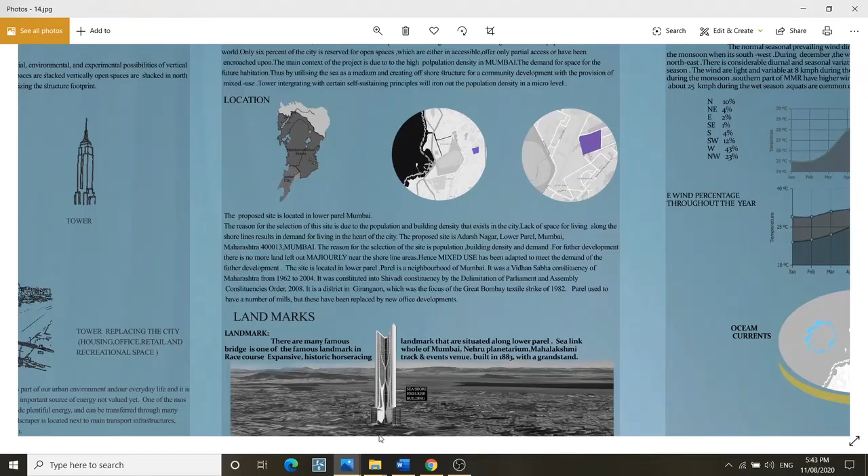There are many famous landmarks situated near the site. One of the famous landmarks near Lower Parel is the Sea Link, one of the most famous landmarks in all of Mumbai. The Nehru Planetarium is also situated near the site, and there is a historic site, the Mahalakshmi Racecourse, built in 1883. There is also a hospital, SRCC Hospital, and the National Sports Club of India. These are the famous landmarks situated near the site.

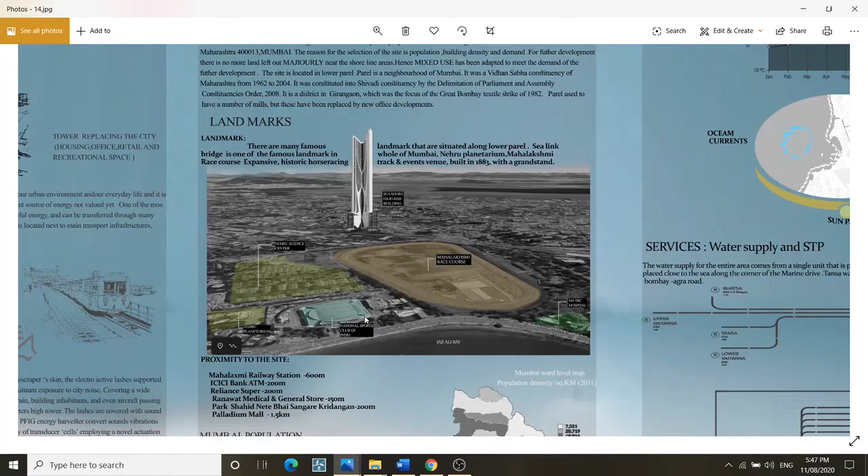Mahalakshmi railway station is 600 meters away from the site, and there are supermarkets and banks nearby. The Palladium Mall is 1.5 kilometers from the site.

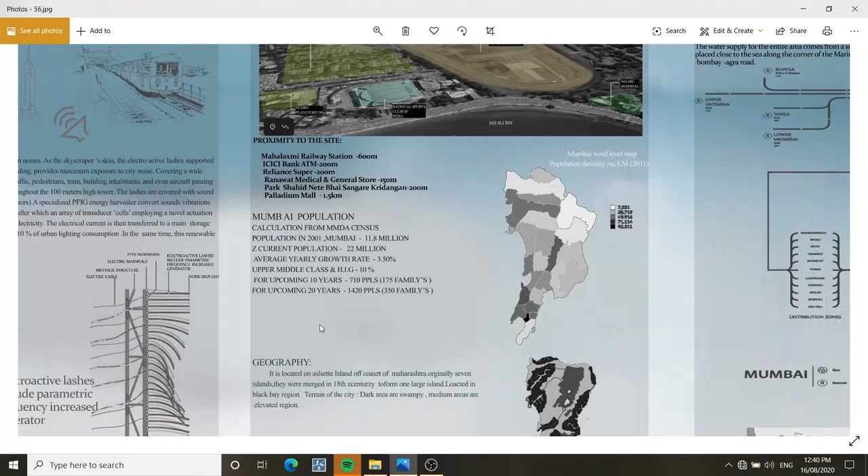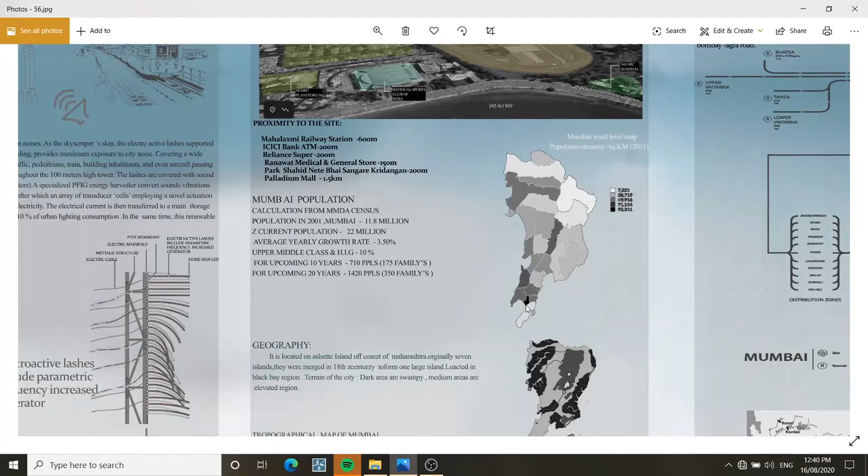The Mumbai population calculation according to the 2001 census is 11.8 million. The current population is 22 million. As you can see in this map, the lighter color represents low population, and the darker color represents denser, more populated areas.

Average yearly growth rate is 3.50%. The upper middle class and higher income growth is 10%. For the upcoming 10 years there will be 175 families, and for the upcoming 20 years there will be 350 families.

Geography: it is located on Salsette Island off the coast of Maharashtra. Originally 7 islands, they were merged in the 18th century to form one large island located in the Black Bay region.

The terrain of the city: the dark areas are swampy, the medium areas are the elevated regions, as you can see in this diagram.

Wind analysis: the normal seasonal prevailing wind direction during the dry season is west-northwest, except during the monsoon when it's southwest. During December, the wind direction fluctuates between west-northwest and east-northeast. There is considerable seasonal variation throughout.

There is little fluctuation in velocity during the dry season. Winds are light and variable at 8 km per hour during the dry season and reach a peak of 13 km per hour during the monsoon. Southern parts of the MMR have higher wind velocity, around 10 km per hour during the dry season, peaking to about 25 km per hour during the wet season.

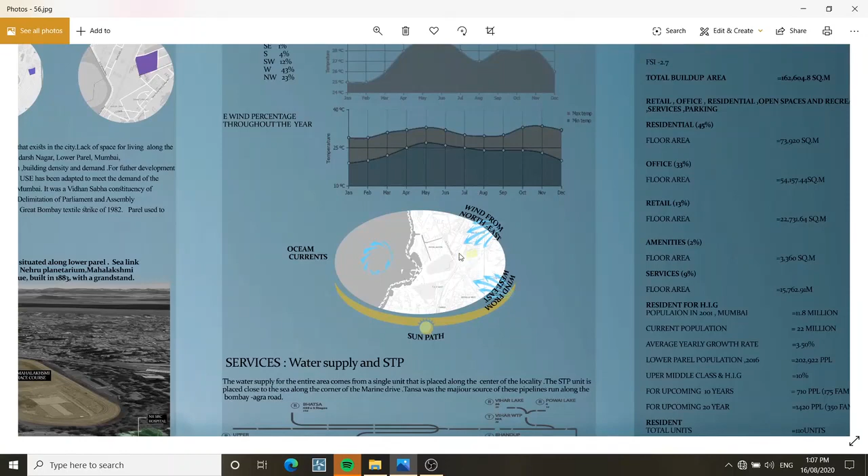And as you can see, this is the site. The wind from the northeast and the wind from the west flow through the site here, and this is the ocean current, and this is the sun path.

The water supply for the entire area comes from a single unit placed along the center of the locality. The STP unit is placed close to the sea along the corner of Marine Drive.

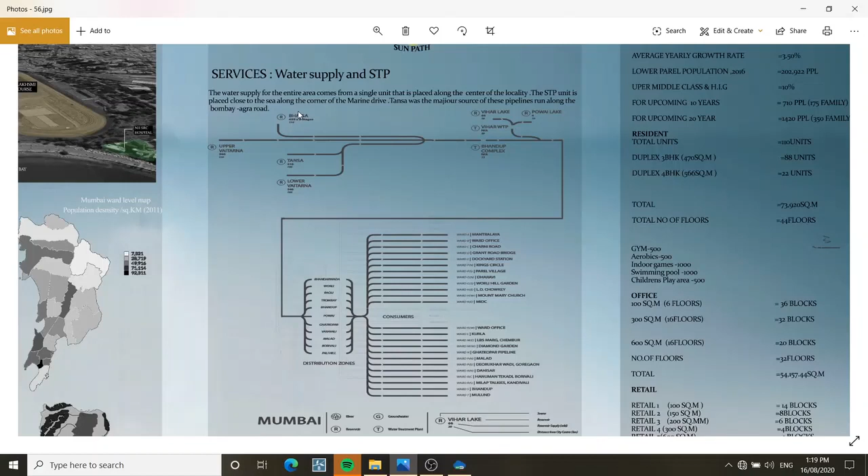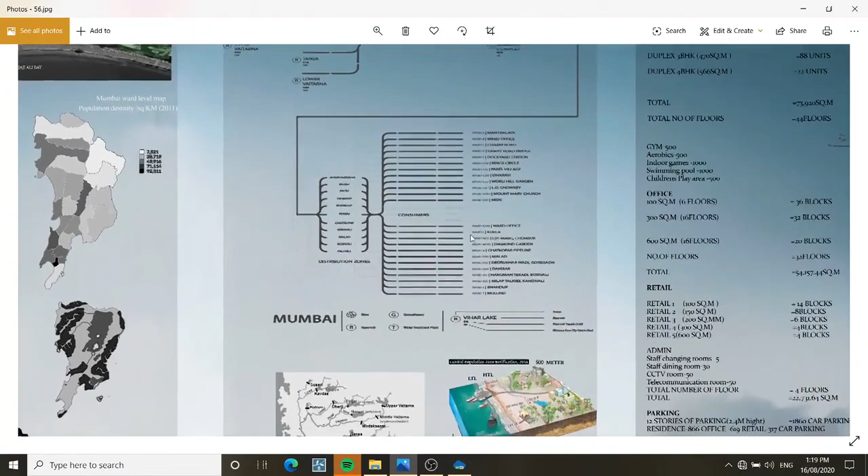Tansa is the major water source for the city. Bhatsa, Tansa, and Lower Vaitarna are the main sources of water, consumed by different areas of the city. This map shows where the water comes from, and these are the rivers supplying water to the main city.

Coastal regulation zone: Mumbai comes under coastal regulation zone 2. Most of Mumbai along the coastline comes under this category.

Area statement: the site area is 14.8 acres. The ground coverage area is 10%, which is 1.48 acres. Road and circulation is 10%, which is 1.48 acres. The OSR is 10%, again 1.48 acres. The FSI is 2.7.

The total build-up area is 1,62,604.8 square meters. The building consists of retail, office, residential, open spaces, recreational spaces, and parking.

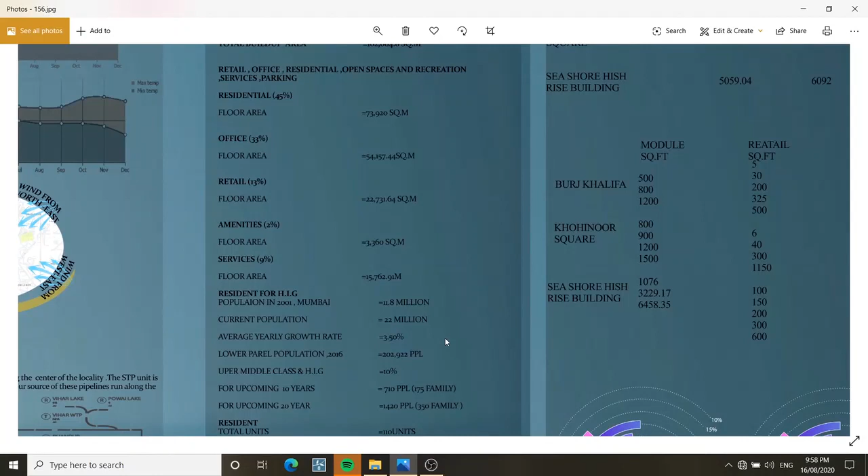The residential consists of 45%, with a floor area of 73,920 square meters. The office consists of 33%, with a floor area of 54,157.44 square meters. The retail consists of 13%.

The retail floor area is 22,731.64 square meters. The amenities consist of 2%, with a floor area of 3,360 square meters. The service area is 15,762.91 square meters.

Residential consists of a total of 110 units. Duplex 3 BHK is 470 square meters, consisting of 88 units, and duplex 4 BHK is 566 square meters, consisting of 22 units. Gym consists of 500 square meters, aerobics 500 square meters, indoor games 1000 square meters, swimming pool 1000 square meters, and child's play area 500 square meters.

In the office, there are three different sizes: 100 square meters, 300 square meters, and 600 square meters. The 100 square meter units consist of 36 blocks, 300 square meters consist of 32 blocks, and 600 square meters consist of 20 blocks. The number of floors is 32, covering 54,157.44 square meters.

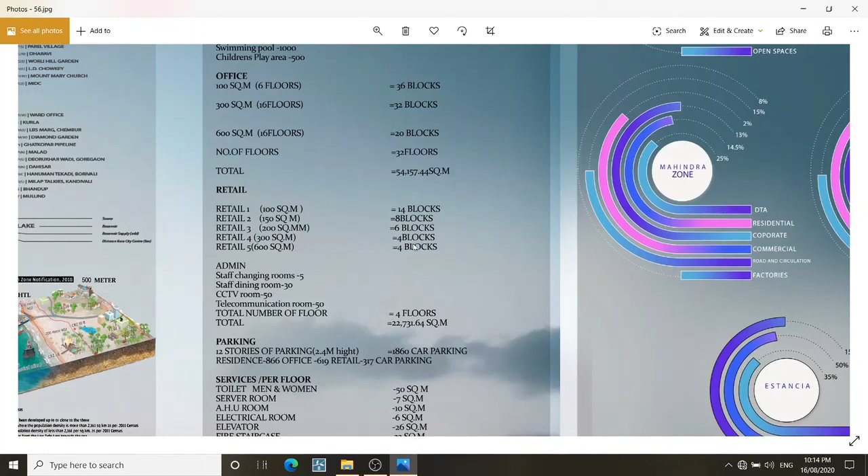The retail also consists of five different types: 100 square meters has 14 blocks, 150 square meters has 8 blocks, 200 square meters has 6 blocks, 300 square meters has 4 blocks, and 600 square meters has 4 blocks.

Parking consists of 12 floors, with a total of 1,860 car parking spaces. Residence consists of 866 car parking, office consists of 619 car parking, and retail consists of 317 car parking.

Service floor: according to the Council of Tall Buildings and Urban Habitat, for every 30 stories there must be a service floor, and for commercial, for every 20 stories there must be a service floor.

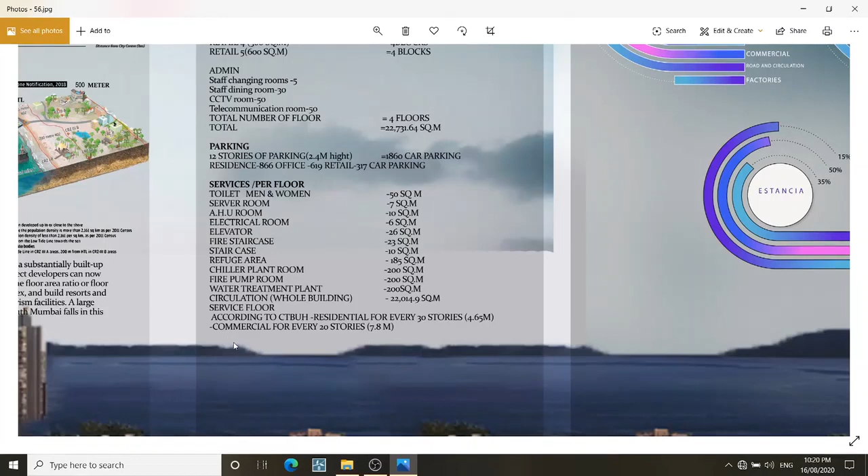Concept: Mumbai continues to overpopulate. It's time to explore the spatial, environmental, and experimental possibilities of vertical living. The tower includes retail shops, offices, housing, and recreational spaces stacked vertically. Open spaces are stacked on the north side for maximum solar lighting.

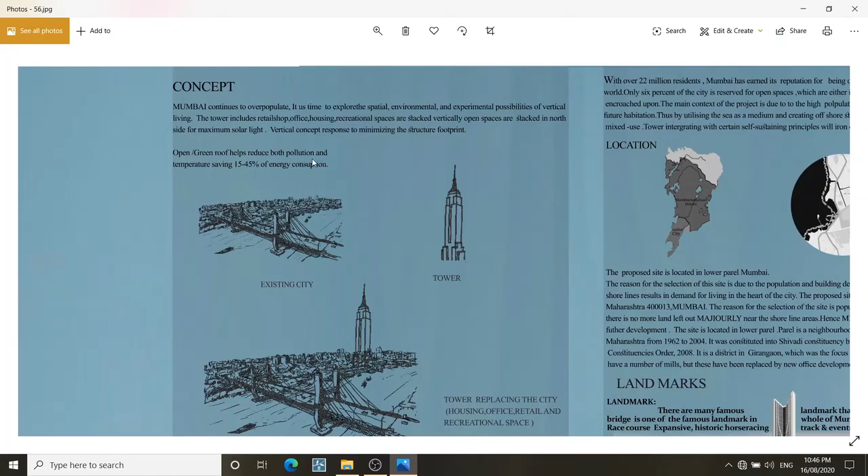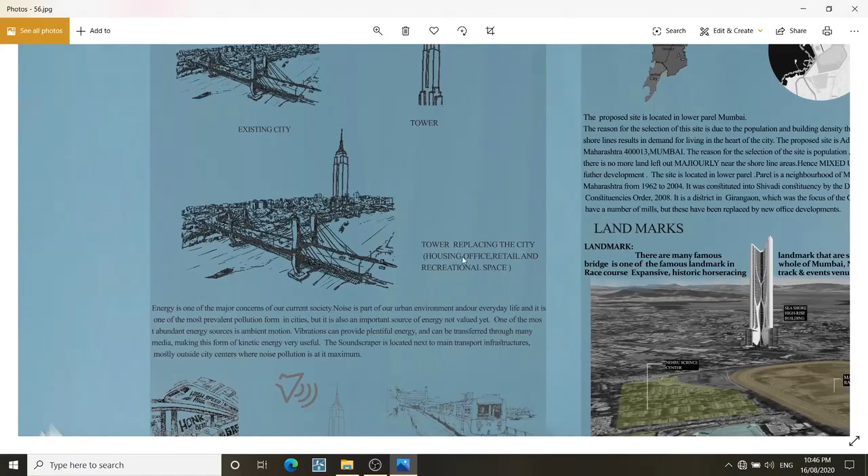The vertical concept responds to minimizing the structural footprint. Open spaces or green roofs help reduce both pollution and temperature, saving 15 to 45% of energy consumption. This is the existing city, and this is the tower replacing the city, consisting of housing, office, retail, and recreational spaces.

Energy is one of the most concerning issues of our current society. Noise is part of our urban environment and everyday life, one of the most prevalent forms of pollution in cities, but it's also an important source of energy not yet valued. One of the most abundant energies is ambient motion. Vibration can also provide plentiful energy and can be transferred through many media, making this form of kinetic energy very useful.

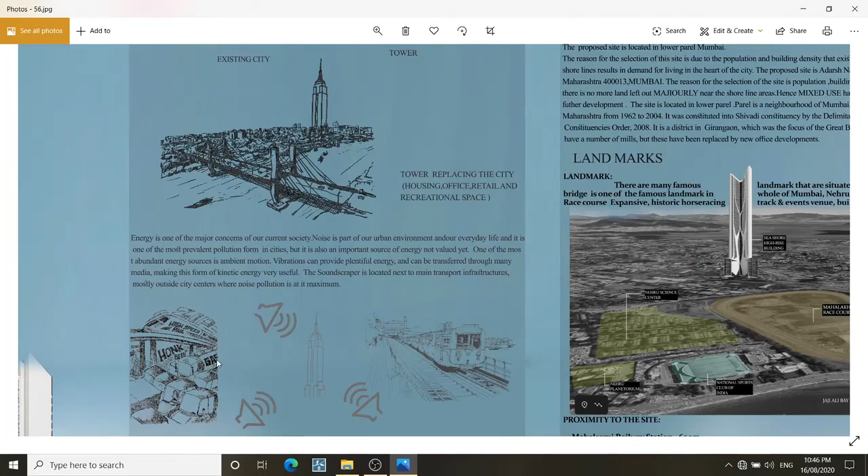The soundscraper is located next to main transport infrastructure, mostly outside city centers where noise pollution is at its maximum. It vibrates depending on the intensity and direction of urban noises.

As the skyscraper skin, electroactive lashes, supported by a light metallic structure, form the exterior of the building, providing maximum exposure to city noise, covering a wide spectrum of frequencies. This noise includes vehicular traffic, pedestrians, trains, building inhabitants, and even aircraft passing overhead.

84,000 electroactive lashes are integrated throughout the 100-meter height tower. The lashes are covered with sound sensor PFIG, a parametric frequency increase generator.

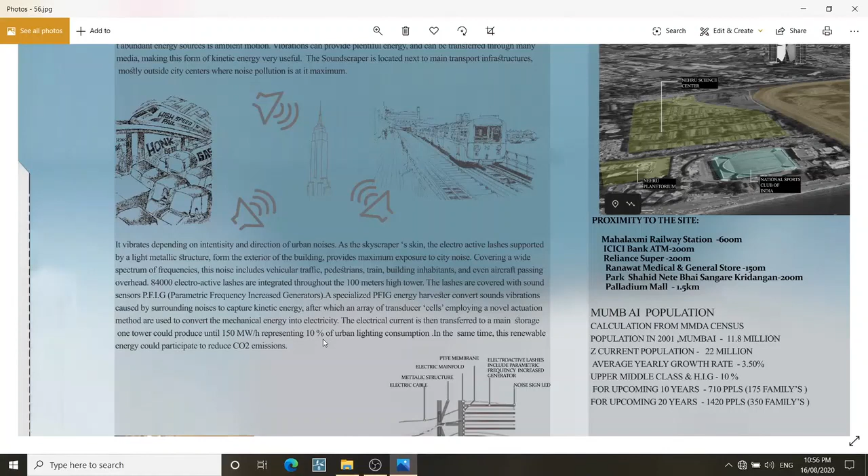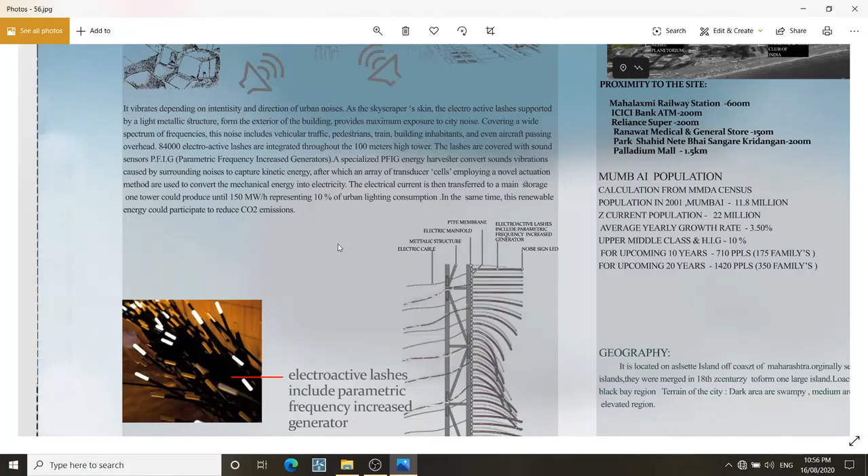A specialized PFIG energy harvester converts sound vibration caused by surrounding noises to capture kinetic energy, after which an array of transducer cells employing a novel actuation method are used to convert mechanical energy into electricity. The electrical current is transferred to a main storage. One tower could produce up to 150 megawatt per hour, representing 10% of urban lighting consumption.

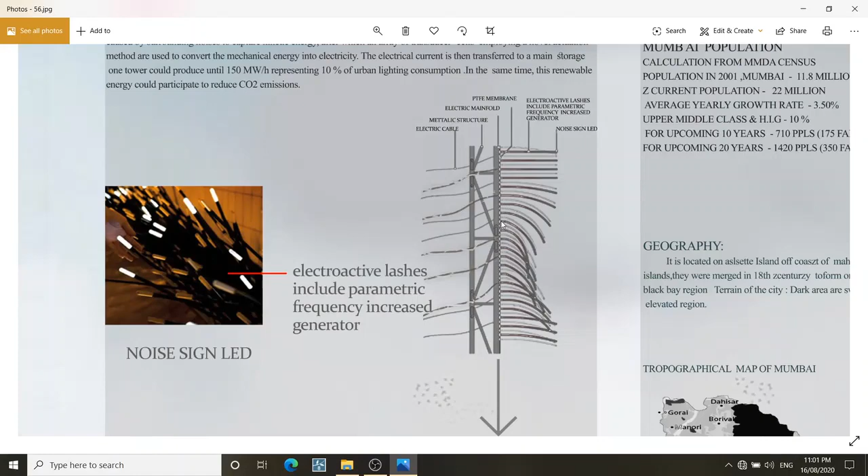In the same time, its renewable energy could participate in reducing CO2 emissions. This is the electroactive lashes, which is also called the noise LED. In this diagram, you can see the electric cable, and this is the metallic structure which supports the electroactive lashes, and at the tip of it you can see the noise LED, and this is the PTFE membrane. Due to vibration and sound, these lashes collect energy and store it in the battery.

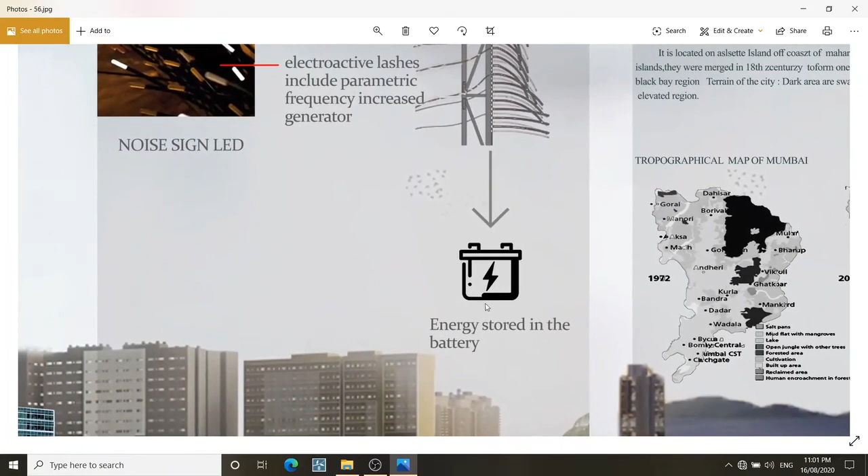Site plan. The site plan area is 14.8 acres. The total build-up area is 1,62,604 square meters. The OSR is 6,022 square meters. The FSI of the building is 2.7. The plot coverage is 6,022 square meters.

This is the site plan of the Seashore High Rise building. There are totally 7 entrances. Gate one is the main entrance, this is the pedestrian entrance, and gate 2 and gate 3 are the entry and exit for the commercial and retail entrances, and gate 4 and gate 5 are the entry and exit for the residential people, and there is a separate entrance for service.

This is the entry and exit of the service entrance, and this is the STP, fire pump room, electrical board, and many others. The site is surrounded by 4 roads: the Lodha Road on the top, Sane Guruji Marg at the right, JP Baruch Marg at the bottom, and Minerva Road at the left side, and there's a railway track passing along the side, which you can see through this image.

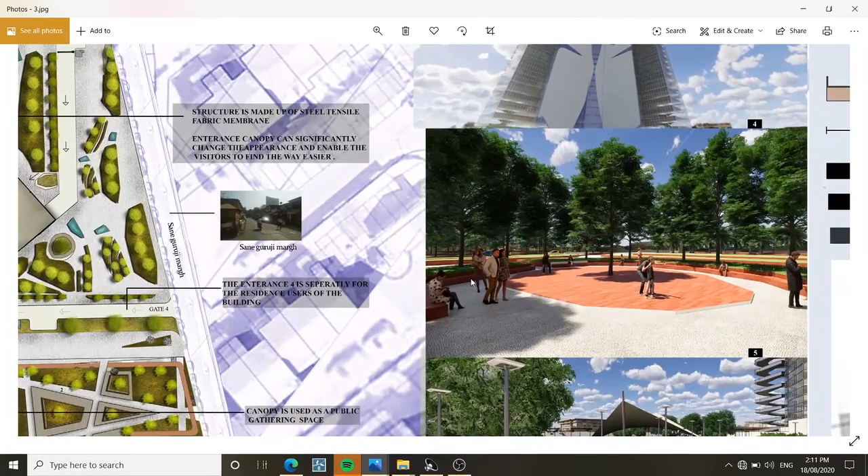As the city becomes more dense and populated, green plaza and open spaces clean the air and improve public health. So I provided a landscape and some water bodies which give us a cool feel, cool air, and you can see through this image this is the landscaping, and there are seating along the landscaping, as you can see here.

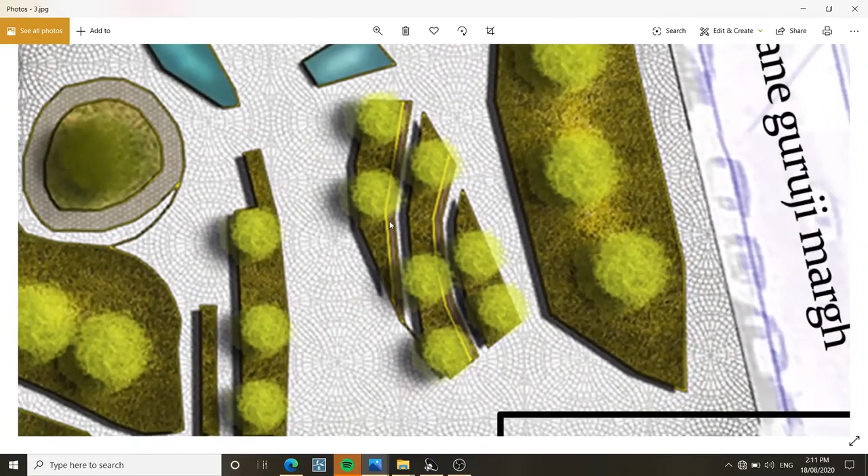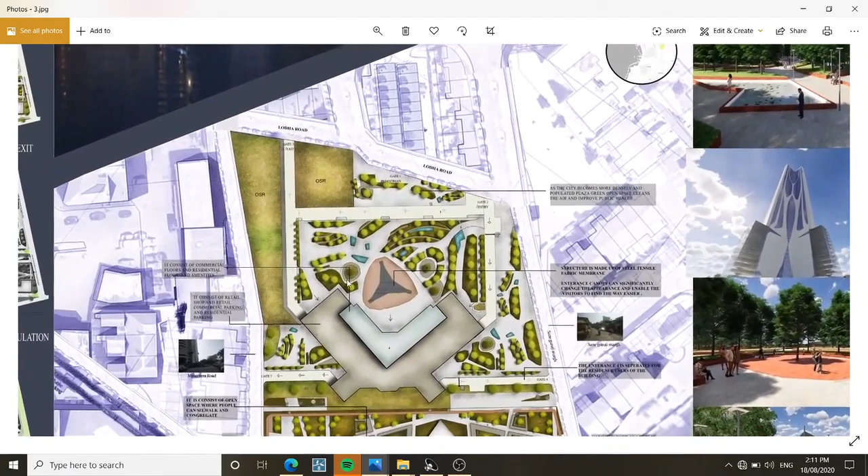This is the seating, and this is the landscaping, and this is the water body. This is a canopy where people can gather. The structure is made up of tensile fabric membrane. At each entrance there is a security booth, which you can see here.

There is a separate park for the people of the Seashore High Rise building, as you can see here. This is the security booth along the park, which allows only the resident people over here, where people can sit, walk, and jog. And this is the jogging track along the park, as you can see here.

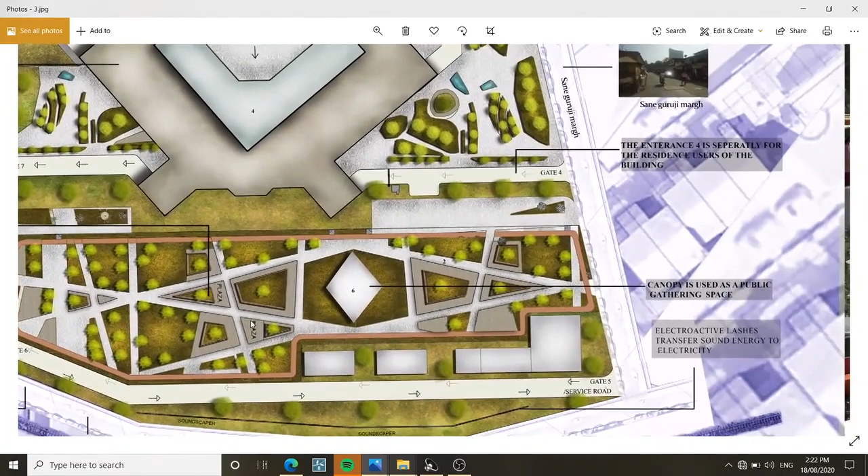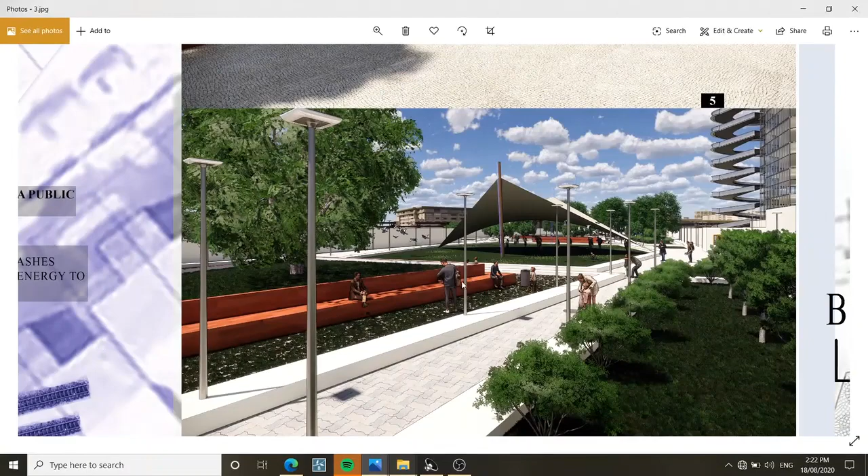This is a canopy where people can gather over here, made of tensile membrane, steel tensile membrane, and this is the plaza where people can sit and talk over here, as you can see in this image. This is the canopy, and these are the seating spaces along the plaza, and this is the walking path.

As you can see, this is the sound scraper. It vibrates depending on the intensity of the urban noises. It consists of electroactive lashes supported by a light metallic structure, providing maximum exposure to any noise, including traffic, pedestrian noise, urban noise, train noise, and even aircraft. What these electroactive lashes do is transfer sound energy to electricity and store them in batteries.

As you can see, the train track passes along the side. This track leads to Mahalakshmi railway station, which is very near, about 500 meters from the site. It's one of the busiest railway stations in Mumbai. The sound scraper will collect the noises from the trains and other noises, and converts sound energy to electricity. It saves 10% of the consumption of the skyscraper.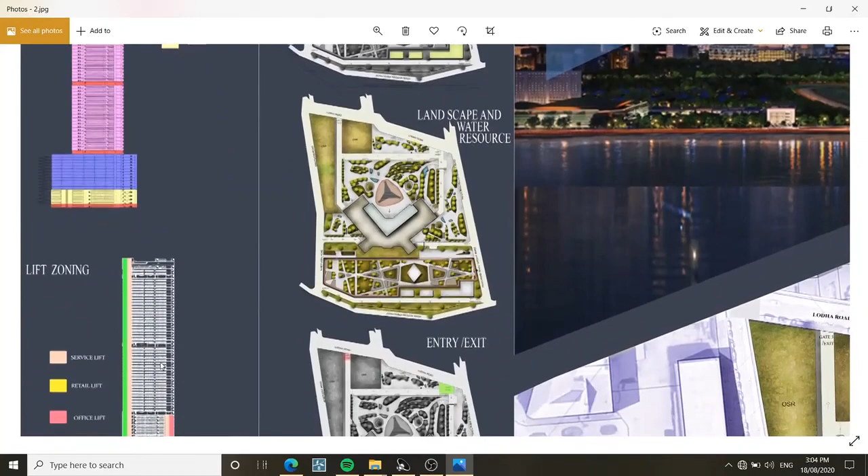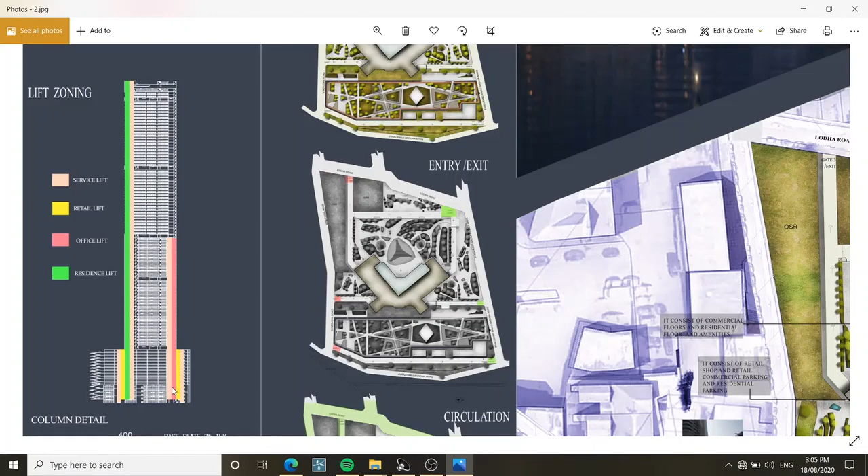Lift zoning: there are residential, office, and retail lifts, each separated to avoid confusion among the people. The residential lifts are indicated by green color, and the service lifts are indicated by peach color. The service lift runs along the residential lift from bottom to top. The office lift is indicated in pink color over here, and it's connected with the service lift and the retail lift.